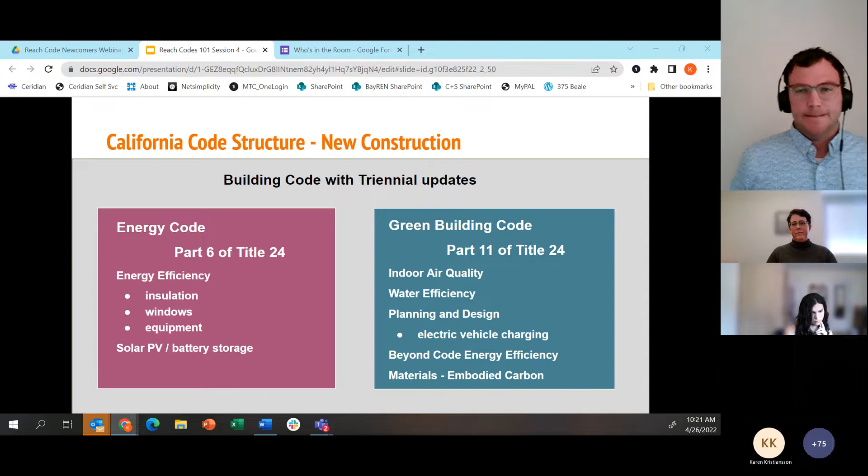In addition to addressing different energy efficiency or design characteristics for new construction, REACH codes that local governments choose to adopt can also address different types of buildings within a jurisdiction, and they have the authority to have their REACH code apply to different building types.

In addition, local governments have the authority to exempt specific building types or equipment types. For example, attached accessory dwelling units can be exempt from the requirements in your ordinance, or industrial equipment could be exempt. There are various other exemptions local governments have decided to include in their ordinances. It's not a full list, just some samples.

So another table for us. What I want to walk through here are the various new construction electrification approaches that local governments have taken over the last several years. There's a couple different ways you could categorize this information, but what we're offering here are three basic approaches that local governments have taken: the natural gas moratorium or municipal ordinance, shown in green.

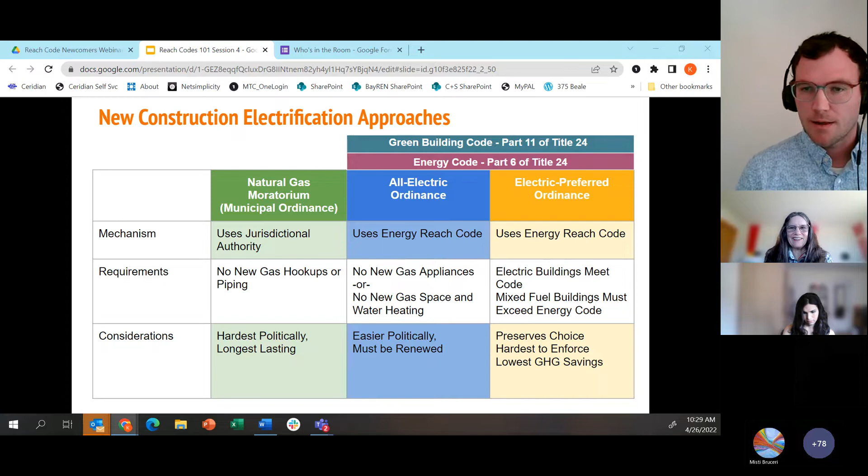So what I wanted to do in the next three slides is go a little bit deeper on each approach and highlight some of the considerations that might go into your decision-making process. This isn't intended to be an all-inclusive step-by-step guide—it's more the universe of things that might be in your decision-making checklist or agenda. Just wanted to highlight some of the pieces here.

Starting with new construction, beginning with the municipal ordinance route—again, this is not tied to the state code, but uses the jurisdictional authority's police powers to prohibit new gas hookups or piping. One consideration is that it has been noted and reported by different jurisdictions that this may be the hardest political route, given it's often referred to as a natural gas ban. It doesn't have to be the hardest politically, but that's been observed.

Another consideration is that because the municipal ordinance isn't tied to the every-3-year update of the statewide building code, it's the longest lasting, in that it doesn't have to be renewed every 3 years. Additionally, from a legal perspective, a cost effectiveness study isn't technically required, but as Karen alluded to in the introduction, cost effectiveness studies are an incredibly powerful tool for decision making. So while it may not be legally required, it's certainly very powerful to have cost effectiveness information at hand when making policy.

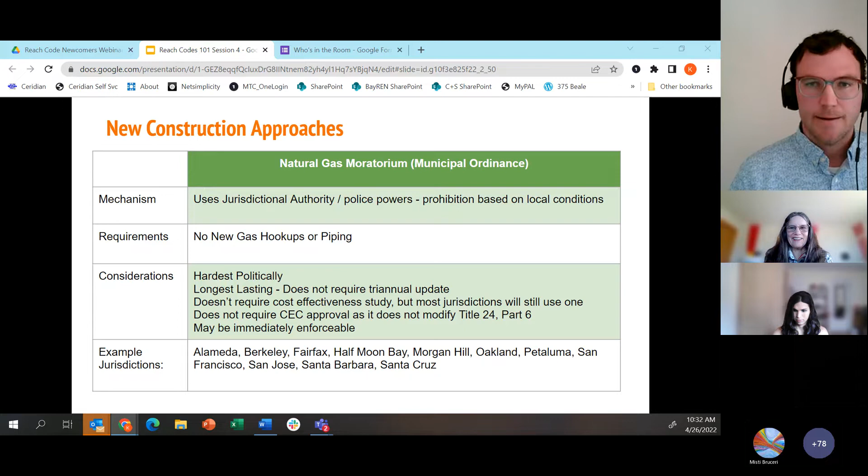All right, moving along the color wheel from green to blue, we've got the all-electric approach. This approach is tied to the state code, and as we mentioned, it can be tied to either Part 11 or Part 6. If a jurisdiction chooses to just focus on an electrification ordinance, the recommended route is to go through Part 11. If the jurisdiction chooses to add additional measures that affect energy efficiency or energy conservation, those measures need to be tied to Part 6.

This approach, as the name suggests, requires electrification of new construction. Some considerations: compared to the natural gas moratorium, it has been seen to be easier to adopt politically. In both the case of Part 11 and Part 6, if the REACH code were tied to either of those state codes, it would need to be renewed every 3 years.

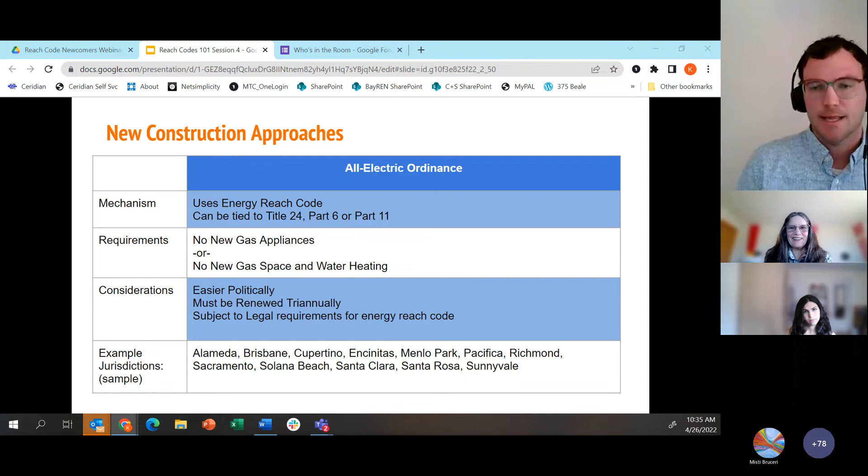The final new construction approach we'll talk about today is an electric preferred ordinance. This type of approach sets up a choice for developers. If a development is built and designed to be all electric, then the requirement is that the all-electric design must meet the statewide standard, the traditional route. If the proposed design goes the mixed fuel route, then there are additional compliance standards that go above and beyond the state code, expressed as a percentage, a compliance margin above the standard compliant design.

Some considerations around this path: given the extra step around that compliance decision, it's been perceived to be harder to enforce, a bit more of a complicated step. Additionally, since not every building in the jurisdiction is required to be all electric, there may be lower greenhouse gas savings from this approach if buildings in that jurisdiction were constructed with a mixed fuel design. This approach is subject to being renewed every 3 years.

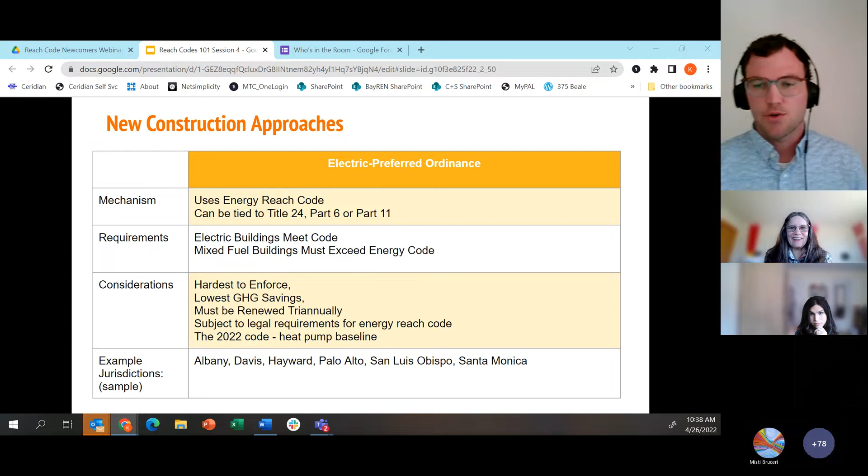Finally, I included some examples here, just a sample of jurisdictions that have gone this approach, for your reference.

To bring it back to what I was discussing previously: the codes themselves, and what's included in them, can serve as a basis for the menu of options available to local jurisdictions. So you have the legal authority to reach beyond the state code via these different areas.

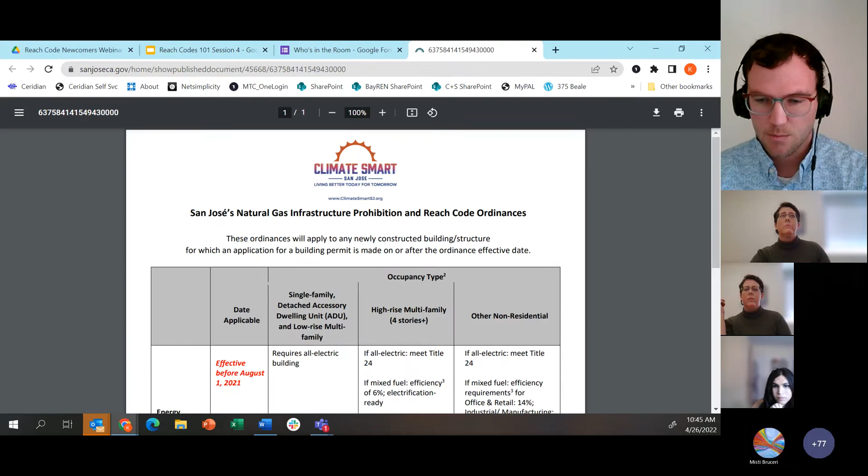Definitely refer to the website. And I actually, as I was putting this together, was obviously reviewing some of their requirements. So I just put into the chat a graphic that summarizes, and this I just pulled from San Jose's website, this table. And so some of the exceptions it looks like they do have in San Jose are for hospitals and for facilities with a distributed energy resource.

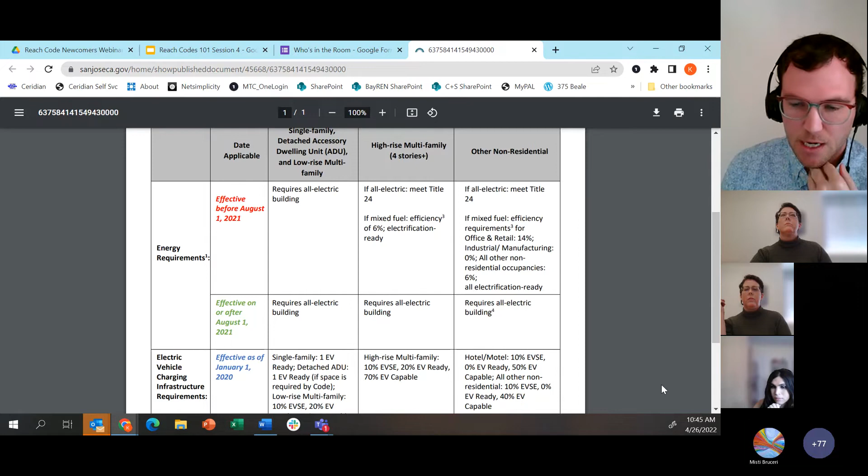Yeah, thank you for screen sharing that. That's perfect. And it looks like limited exemptions allowed by request on or before December 31st, 2022 for commercial cooking equipment located in food service establishments and processed loads in manufacturing and industrial facilities.

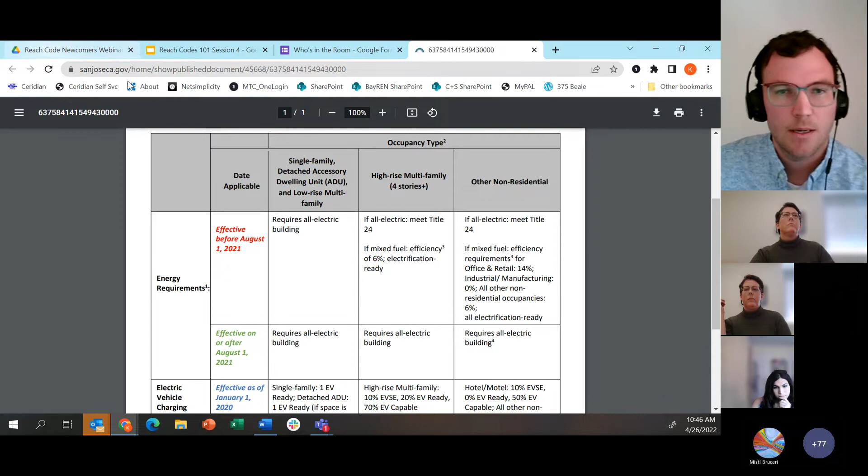Yeah. And then I'm seeing questions here, and Misty and Amy have been both responding in the chat, but it seems like there's a little more clarification desired about Part 11 and Part 6 and all electric requirements. So starting with the most recent question, asking, can a REACH code have an all electric requirement and go through Part 11, but not Part 6? And Amy, Misty, do you want to, since you've been talking about that in the chat?

So maybe some history would help, because it is a little bit of an evolving challenge. Part 11 interacts with Part 6, so it gets complicated quickly in certain areas, because the way CalGreen was designed was that it has intentionally, because it has elements that are optional, it is a little bit of like the experimentation zone. And so there have been historically things that are energy code specific that were introduced in CalGreen as optional and then have transferred over the course of time. And so some of the things, for example, that are merging over from Part 11 to Part 6 in this upcoming code cycle are photovoltaics.

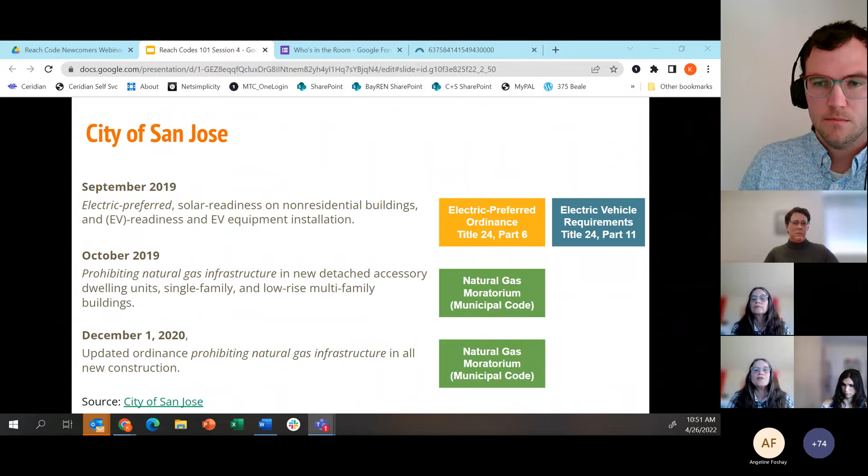Thank you, great job explaining what's a really complicated process, and there's lots of options, and that presentation really just focused on electrification opportunities, and there's so many more ways to build on it. I just want to put out, feel free to ask, because it's how you word the actual code language that changes the procedure sometimes. Most of the time not, but occasionally it's always acceptable to ask questions. So little things are funny when you're dealing with code changes. Thank you for walking us through that, everyone.

Now we get to turn to the even more fuzzy area. Hopefully we can have some fun discussing this as well. So this portion of my presentation, again, I'm Amy Ryder with the Building Decarbonization Coalition, and I get to talk about existing building options. This is both a dynamic and evolving area of local government authority, but also something that other types of agencies are looking at for their own authority right now. So we'll walk through the local government options, but then some of the other things that are happening both at the regional and state level as well. And I'll spend a little bit of time talking about waivers and exemptions, kind of the history of these different options as well. So we'll go ahead and get started.